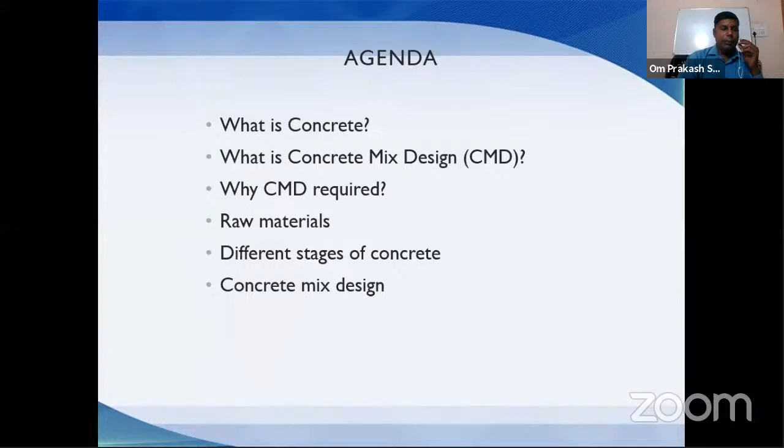So coming to the point, what is concrete? Basically, whenever we ask what is concrete, usually everyone says it's a mixture of cement, water, aggregate. Aggregate may be fine, that is also called sand, usually known as balu, reta, bajri at different names at different places. Then coarse aggregate - 20mm, 10mm, 40mm - and local names are gitti, rodi, and whatever.

And after that, mineral admixture. It is not required at small sites, or usually it is added to the cement also at a cement plant, and then chemical admixture. But as Jain sir said, a fixed proportion, a required proportion must be there. It's just like making a favorite recipe or tea - if balance is not there, the recipe or tea or the concrete, whichever we are making, will not serve its purpose.

And what is the purpose? For concrete, the purpose is workability - workability means how it will work, how we can work with it - strength, durability. These are some requirements it should satisfy. So how will it satisfy these? With the right proportion, the required proportion. That we will see in further slides.

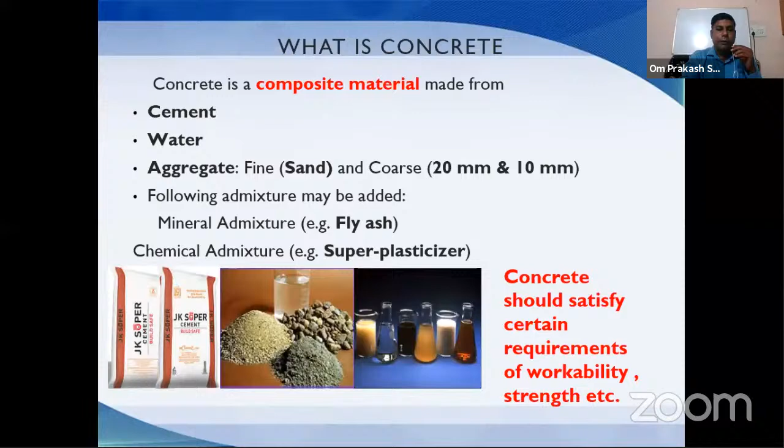So what is mix design? According to IS 456, it is the process of selecting suitable ingredients with certain proportions to satisfy the requirements. What are the requirements? Minimum compressive strength, or in some cases if tensile strength is also required, workability, durability, but it should be as economical as possible.

Why is economy required? Being an engineer, it's our moral duty to make optimization in civil engineering. Anyone can make concrete - you just add 10 bags of cement or 12 bags of cement, concrete is there. If your required grade is M20 or M25, you are adding 10 or 12 bags of cement - it's not economic, it's not optimized.

When is it optimized? When you are using the minimum quantity of cement and getting the desired properties, then it is optimized concrete mix design. And it is our moral duty, or we can say it is our liability as engineers, to make it economical, but there should be no compromise on the desired properties.

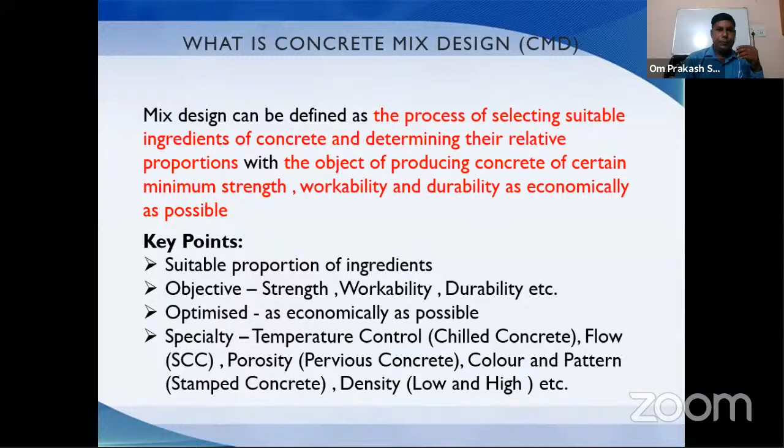So again, what is concrete design? It is the proportioning carried out to achieve specified characteristics at specified days, at the age of 7 days, 14, 28, 56, as per the requirement of site, workability, and durability.

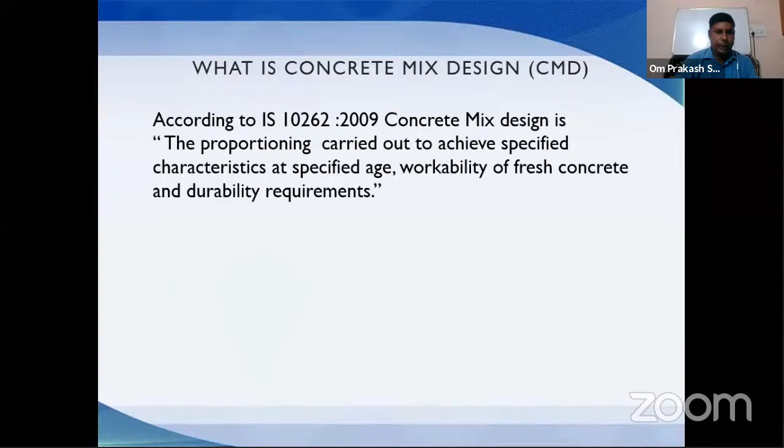Why is concrete mix design required? At regular sites, generally nominal mix design is used by all the contractors or engineers, and who are the designers for them? The labor present at the site, they are the designers of the mix. They decide how much bag of cement is required, how much quantity of aggregate to be added, what quantity of water to be added, and it's not fixed. It's just their experience, or site requirement, that they are just mixing and placing, and once it is set, nobody cares. Concreting has been done, my slab is ready, my column is ready, my beam is ready, all my structure is ready.

So the point is why CMD is required. Because we have to choose the best proportion to make it economic and to serve the required properties of durability, strength, and workability.

So what are the requirements for it? What kind of cement are we using? We must know this, along with the specific gravity of aggregate, fine aggregate and coarse aggregate. Their specific gravity is to be known.

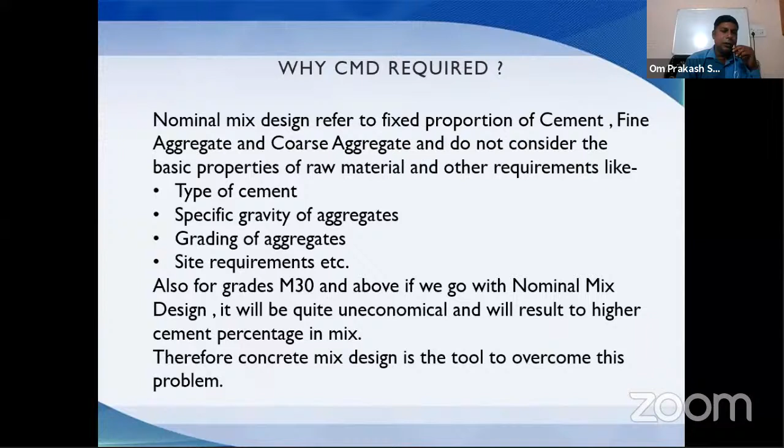So what is the proportion? Cement, fine aggregate and coarse aggregate -- 1:1:2, meaning one part of cement, one part of fine aggregate and two parts of coarse aggregate. This proportion is on weight basis, meaning you have to weigh the material. If you take a 50 kg bag of cement, you have to take 50 kg of fine aggregate and 100 kg of coarse aggregate.

But what is the practice at site? They do volume batching. They take one bucket or one pharma of cement, one pharma of fine aggregate -- sand, balu, reta, whatever -- and two pharma or two buckets of coarse aggregate.

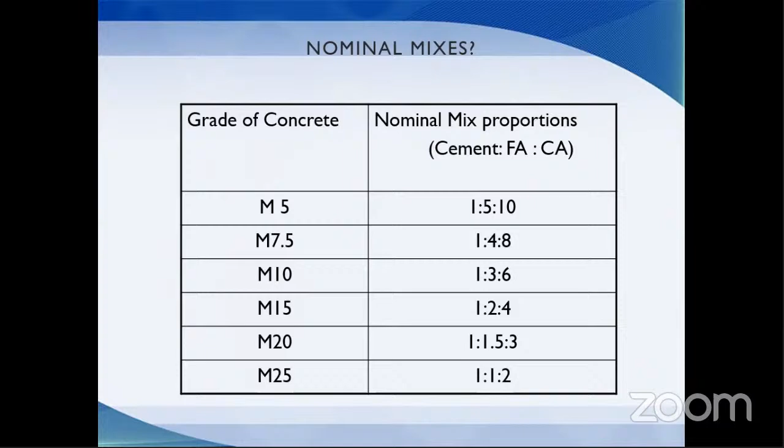And if we weigh them, we get to know the proportion which must be 1:1:2 is now actually 1:1.5:4. This means your cement percentage has been reduced, you are adding more fine and coarse aggregate, and you are still thinking about strength and durability. No, it is not possible, because the proportion has been made wrong. What is required and what has been done are very different.

So nominal mix design, generally carried out at the site, is not suitable to the requirement of the structure, or as far as consideration to the strength and durability.

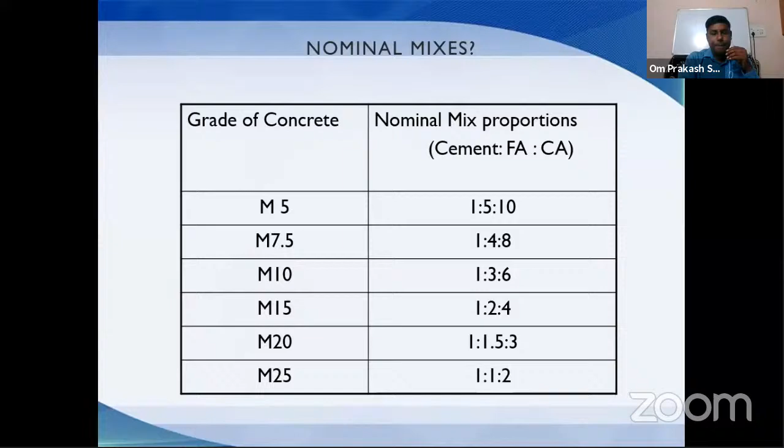Now, we will discuss about the material. Am I moving very fast, Ankit ji?

Ankit ji, can you hear? No, sir. Am I moving very fast? Okay, it's okay.

In our country, India, what are the types of cement available? We know there are various types, but mostly used cements are Ordinary Portland Cement and Portland Pozzolana Cement, that is OPC and PPC. In OPC, we have two grades, 43 and 53. Earlier, 33 grade was also there, but now it has become obsolete and replaced by PPC or PSC cement. So these four cements are mostly used, along with others like rapid hardening, sulfate resisting, and white cement. There are many types, but they are only 2% of the total cement requirement.

So what should be the property of cement? It should be fresh and of a good brand, meaning it should not have undergone any alteration. It should be lump-free; there should not be any lumps, since once cement gets moisture, lumps may form. And what are the requirements of the site? Where you have to pour the concrete, what is the requirement of the structure, what is the location, whether it is a coastal area or a hilly area - on this basis, cement to be used is decided. And proper storage is always required, whether it's a small site or a big project.

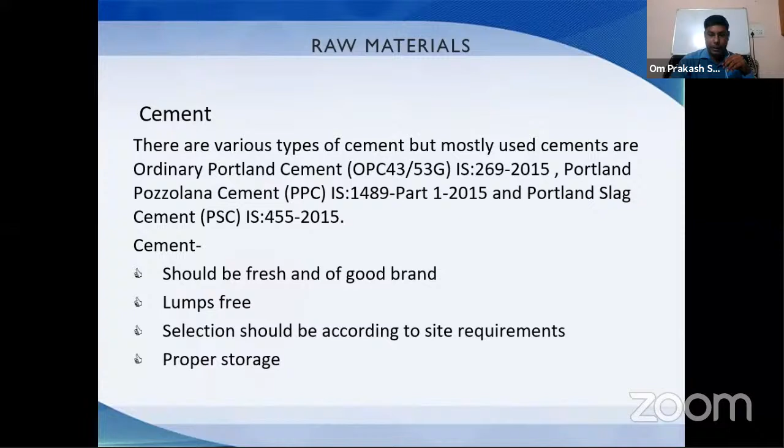Next is water. Let me tell you one thing - we all are civil engineers. After water, concrete is the most usable material in the world. Can you believe it - water is the most required necessity in the whole world, and after that, concrete is the most usable material in the world.

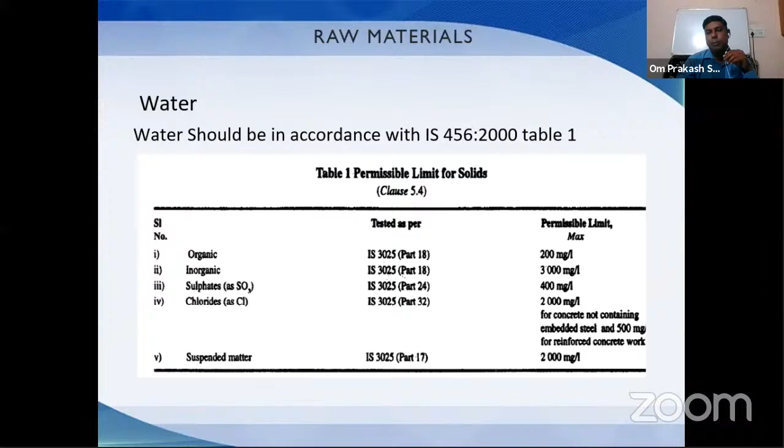So coming to the point, water. What should be the property of water? It should be in accordance with Indian Standard 456, Table 1, where certain properties of water are given: organic, inorganic, sulfate, chloride, suspended matter, and permissible limits are given there. If we test the water, it should be within the permissible limits. Or we can say potable water, which is drinkable water, can be used in concrete for both mixing and curing.

The pH of water should not be less than 6. If it is less than 6, it means the water is acidic, which will harm the concrete. As we know, the pH of neutral water is 7, so it is good if water has a pH between 6 and 8. Usually all potable waters have a pH between 6 and 8, so potable water can be used.

It should be free from organic impurities, and seawater cannot be used or must not be used while making concrete, or even while curing concrete. Seawater must not be used because it has so much salt and impurities, which will corrode the steel and ultimately cause a reduction in strength, loss of durability of the concrete, and final loss to the structure. A structure made for a 50 to 60 year service life may not give the desired lifespan.

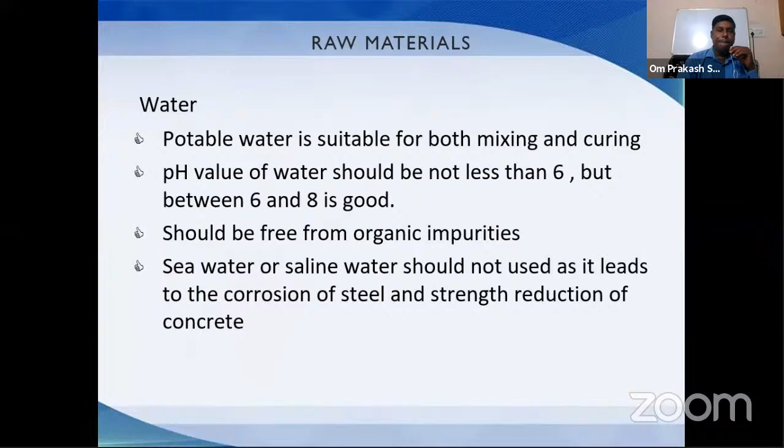So coming to fine aggregate and coarse aggregate. What are fine aggregates? The aggregates having a size of 4.75 mm and down are called fine aggregate, or in a simple way, we can understand 5 mm down aggregates are fine aggregate.

It should be coarser, angular, hard, and sharp grained. It should not contain organic matter, just like water - fine aggregate also should not contain organic matter. It should be strong and durable, and should be well graded.

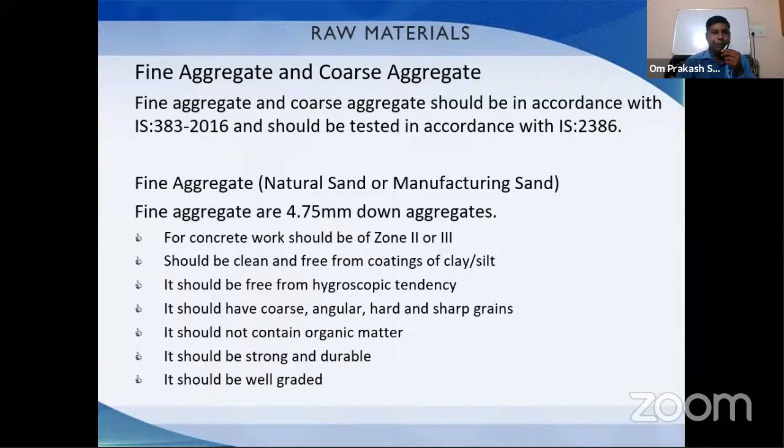So we have to take a sample of fine aggregate, make the sieve analysis on the given sieves, and check the percentage passing. All sieve sizes must have the required material percentage.

Zone 1 to Zone 4 represent particle size differentiation for fine aggregate. Zone 1 is the coarsest, and Zone 4 is the finest. For concrete mix design, we mostly need Zone 2 or Zone 3, which are the most suitable zones. In my view, Zone 2 is the best proportion or zone for making a concrete mix design with optimization.

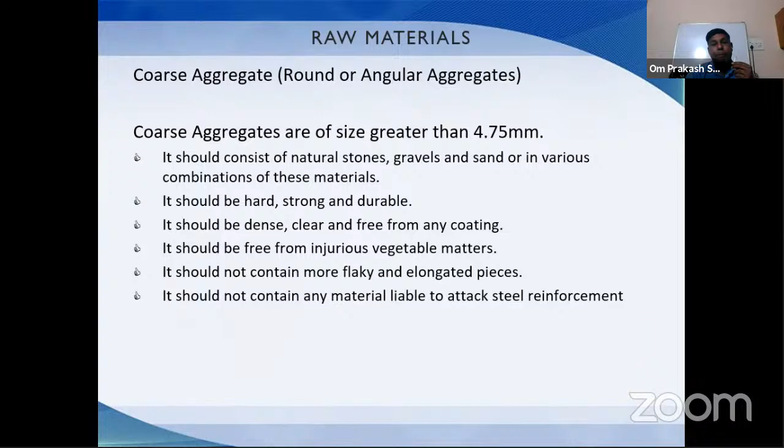Now coming to the grading of coarse aggregate. There are various sizes of coarse aggregate available: 63 mm, 40, 20, 16, 12.5, and 10 mm.

Mostly used coarse aggregates in concrete are 20 mm and 10 mm. 20 mm down aggregates are widely used in concrete, while 40 mm size aggregates are generally used in PCC or lean concretes.

So what should be the grading? Again, if we are taking 20 mm aggregate, we have sieve sizes of 40 mm, 20 mm, 10 mm, and 4.75 mm.

We have to do the sieve analysis of the sample of coarse aggregate which we are going to use in the concrete design, and again check the percentage passing. It should come under the given limits, and we'll discuss what to do if it's not satisfying the given limits.

If it is not satisfying the given limits, we can add a further size of aggregate, just like 10 mm, and make their proportion to achieve a close grading, which is given on the right side of the 20 and 10 column. Make a certain proportion, check for the sieve size, and it should satisfy the given limits.

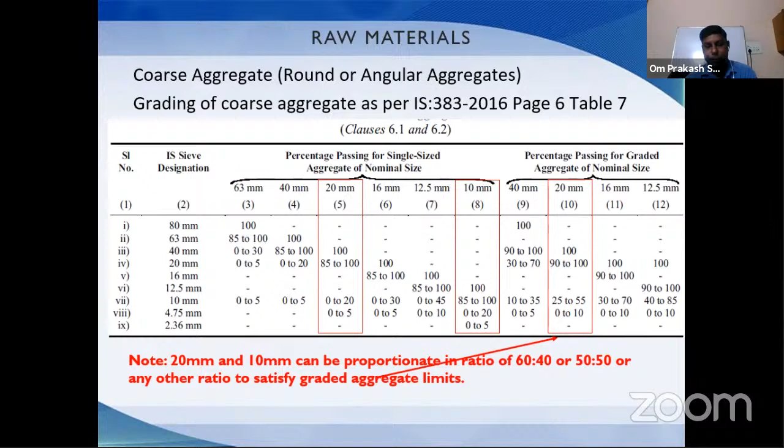Now, all-in aggregate grading is a very important term in concrete mix design. We use cement, water, fine aggregate which is sand, and coarse aggregate of 20 mm, 10 mm, or 40 mm. So the proportion of sand and coarse aggregate should be such that it gives you denser packing, or dense packing. For that, the limits are given in IS 383, page 7, table 10.

Take the proportion of sand, 20 mm, 10 mm, mix them, and go with the sieve analysis. The limits given are: for 20 mm nominal size, on the 40 mm sieve, all material should pass, meaning the material should be 40 mm down, so it should pass 100% from the 40 mm. Then on the 20 mm sieve, the proportion should be 95 to 100. On the 4.75 mm sieve, 30 to 50%; on the 600 micron sieve, 10 to 35%; and on the 150 micron sieve, 0 to 6%.

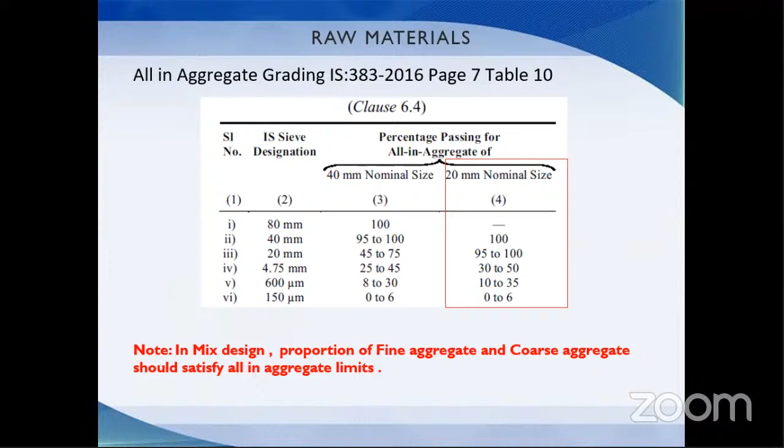My suggestion is to keep the readings within the given limits, but not at the extremes. For example, for 4.75 mm, if the percentage comes to around 38 to 45%, it is very good. And for 600 micron, if it comes to 15 to 20%, very good. This will give you dense packing in the concrete, which will ultimately save your cement, give you good workability, and result in higher strength.

Now, the most important term in concrete mix design is the SSD condition, saturated surface dry. Let me explain what SSD condition is.

As we know, there is a term in concrete mix design called water cement ratio, meaning how much quantity of water we are using and how much quantity of cement we are using. The weight of water divided by the weight of cement gives the water cement ratio, which tells us the quantity of water required in the concrete mixture. Why are we adding water? Because cement always needs water. Without water, there is no importance or working of cement. Cement will not serve any purpose if we do not add water to it. So what is our requirement?

Our requirement is to make the cement paste. We want to add water to the cement so that it makes the paste and the chemical reaction of hydration can proceed, along with providing workability. To explain again: when we add water to cement, it makes the paste, hydration of cement starts, and in the concrete mix, water is also required for workability. So why are we adding water? We are adding water for the hydration of cement and for the workability of the mix.

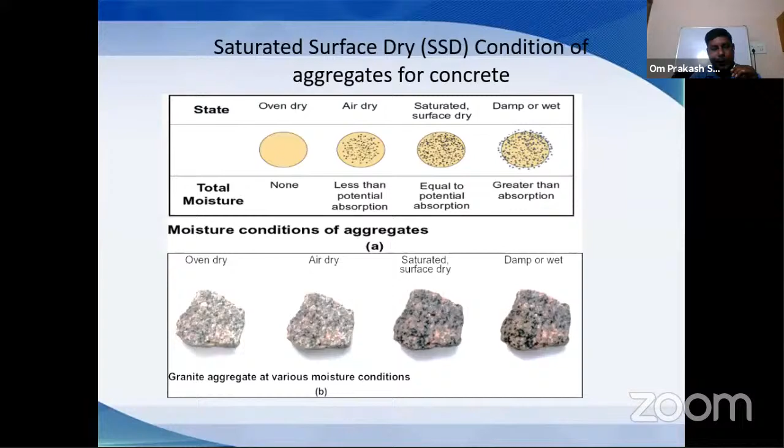Next, chemical admixtures. Chemical admixtures are widely used in construction these days. I think all of you have heard about Dr. Fixit, that advertisement done by Mr. Amitabh Bachchan - that Dr. Fixit is also an admixture. There are various types of admixtures: accelerating admixture, used for fast setting of concrete; retarding admixture, to delay the setting of concrete; water reducing admixture, to reduce the water demand of concrete; air entraining admixture, to increase the workability of concrete or to make lightweight or cellular lightweight concrete. The most commonly used admixture is super plasticizing admixture, which has two properties: it has the retarding property, meaning it delays the setting or maintains the liveliness of concrete for a longer time, and it reduces the water demand of the concrete.

So what should be the properties of the admixture? Certain properties are given in Indian Standard 9103, which we will not discuss here. The most important property is pH should not be less than, just like water - the admixture should not have pH less than 6. And if we are using chemical admixture in concrete mix design, it should give around 20, 25, or 30% water reduction. If we are taking it for just 5% or 7% water reduction, then it is of no use. It should not have any chloride content, or if it is having, it should be well within limits. And when we are using super plasticizing admixture, the strength of concrete should increase with respect to the control mix, which is prepared without the admixture.

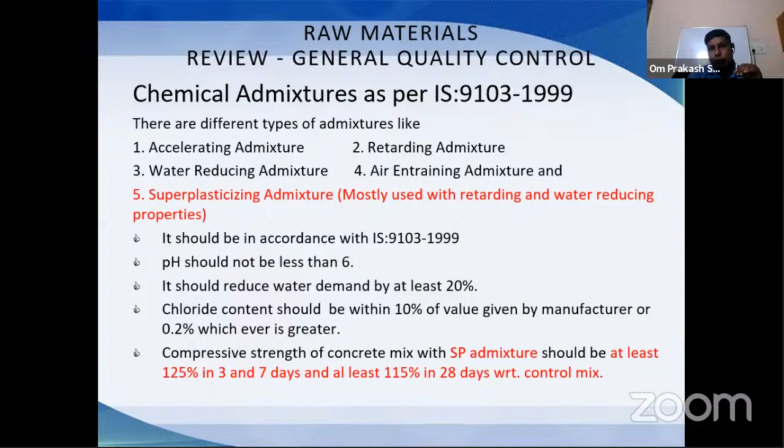So what are the different stages of concrete? First is batching of concrete, which we have discussed - nominal mix design, nominal batching, or concrete mix design, where the weights are given according to the concrete mix design. After that, mixing of ingredients - cement, water, fine aggregate, coarse aggregate, or chemical admixture, and if we are using further materials like polypropylene fiber or steel fiber, according to requirement. Then placing of concrete, where it has to be placed, like for column, beam, slab, or foundation. Compaction of concrete is always required - without compaction, concrete may lose 20 to 25% of its strength. Then finishing of concrete.

After we have finished placing the concrete, what comes next? The hardening stage. This means we have to cure the concrete for certain periods, let's say 10 days, 14 days, or more, up to 21 days as per the requirement. After that, once it is hardened, we have done sufficient curing.

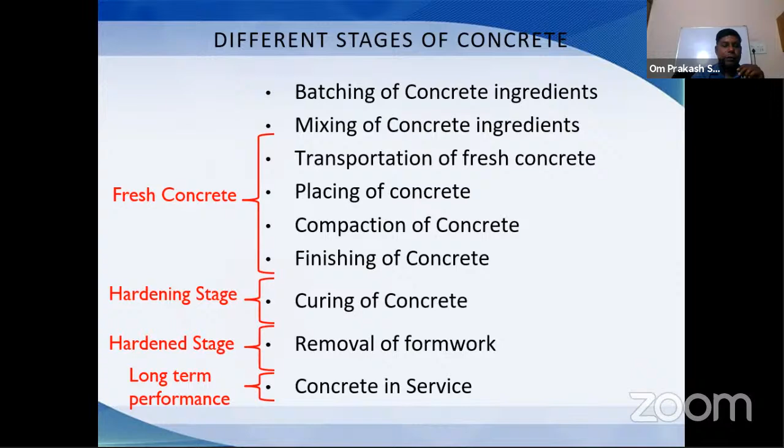So when it comes to concrete, we are discussing the characteristics required: strength at a certain age, workability, and durability. Now I am explaining workability. What is workability of concrete? The workability of concrete, in a simple definition, is not just by virtue of which we can do work with the concrete. No, it's not like that.

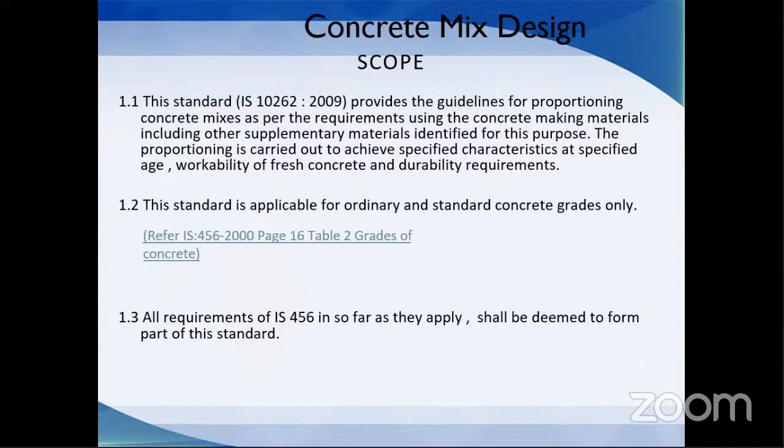Now, what are the concrete grades generally used at the site? There are three basic types of concrete grade: ordinary, standard, and high strength concrete. Let me show here.

Ordinary concrete is M10 to M20, or below M20, basically PCC, plain cement concrete, where steel is not used. M20 to M50 or M55 is standard concrete, generally used on various sites. M55, M60 and above are high strength concrete, generally used in projects where much load is to come, like metros or high-rise apartments in Mumbai or Delhi, where the stories are more than 50, 60, or 80 floors. There, such high grade concrete is used.

Now, what is M? M refers to the mix. Sometimes at the site, even engineers say M stands for masala. No, friends, please always remember M refers to the mix. It's not masala, it's not mortar. Masala is mortar, a mix of sand and cement where coarse aggregate is not used. M stands for mix only.

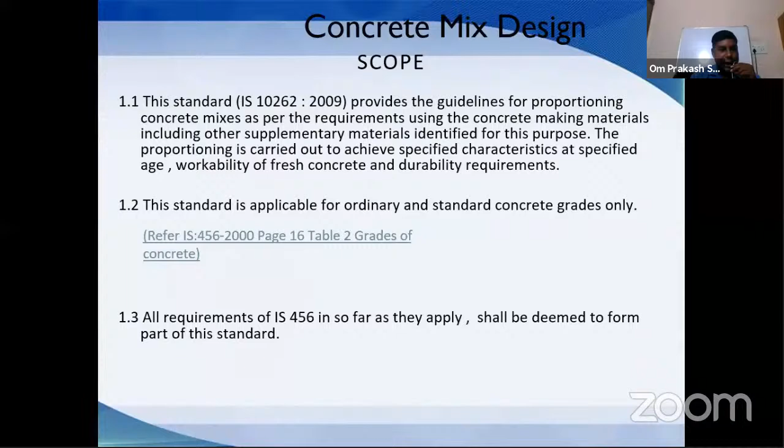So here are some references needed while doing concrete mix design. IS 383 refers to the specification for coarse and fine aggregate. IS 456, which we all engineers know, is just like a Bible to us. IS 2386, IS 3812 for pulverized fuel ash specification, and IS 269 for ordinary Portland cement specification.

Now, after 2015, the specifications for all cements have been included in only one code, IS 269. Earlier there were different codes for OPC cement. IS 1489 is for PPC, Portland Pozzolana cement. IS 455 is for Portland slag cement. And IS 9103 refers to the specification for concrete admixture.

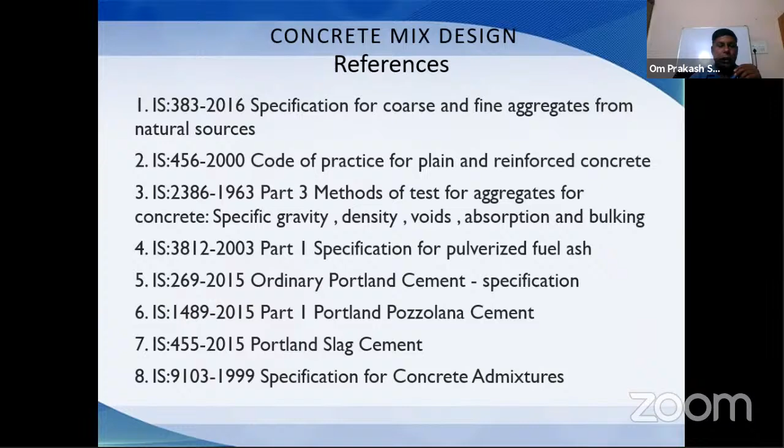So now we are coming to the practical work of a mix design. How will we do the mix design?

First of all, what we need, we must know what we are going to do. So what we need is the concrete grade. Obviously, we are going to do the concrete mix design, so then we must know which grade is required. If we don't know what we have to make, then what will we do? So we must know the grade of concrete, as we earlier discussed. We must know which grade we are going to produce, M20, 25, 30, 45, 50, which one. So we must know the concrete grade.

Then what kind of cement we are using? We are using OPC cement or PPC cement or PSC cement. In OPC, we are using a 43 grade or 53 grade. We must know the type of cement.

Then we must know the minimum cement content for a particular grade. What is the quantity of cement below which we cannot go? We will also discuss the maximum water cement ratio. We must know what should be the ratio of water to cement, and it is maximum. Cement content is minimum, meaning cement quantity is minimum, below which we cannot go. And the water cement ratio is maximum, meaning it cannot go beyond it. So our water cement ratio should be well within limits, and our cement content should be more than the required minimum cement content. And how will we get it? From where will we get it?

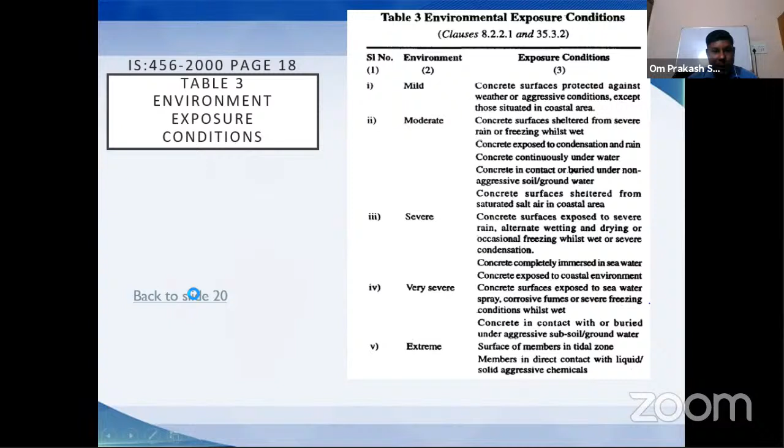Now, maximum nominal size of the aggregate. It means the maximum size aggregate - the biggest size aggregate that we are using, what is its size? As we discussed sand and coarse aggregate, coarse aggregate we are having 20 mm and 10 mm. So if we are using 20 mm, our maximum nominal size will be 20 mm.

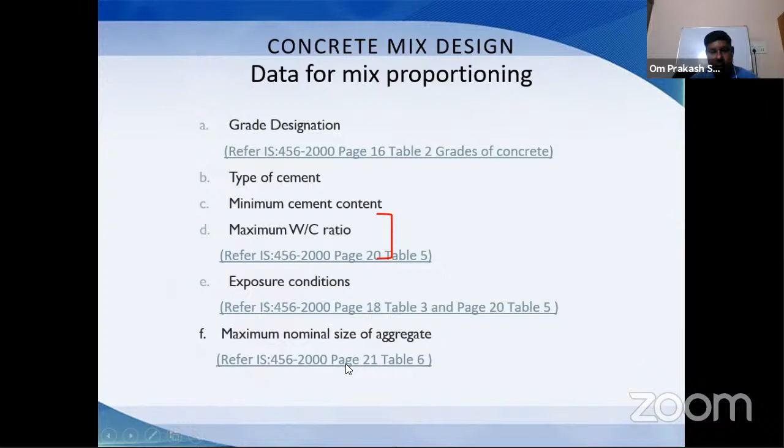And why is it required? Let's say we are making 3 concrete mixtures, each using 1000 kg of coarse aggregate. In mix A, the first mix, I am using 10 mm only. In the second mix, I am using 20 mm only. In the third mix, I am using 40 mm.

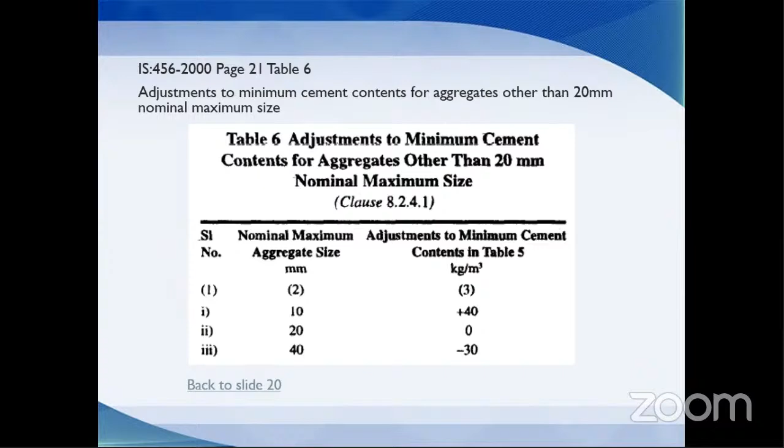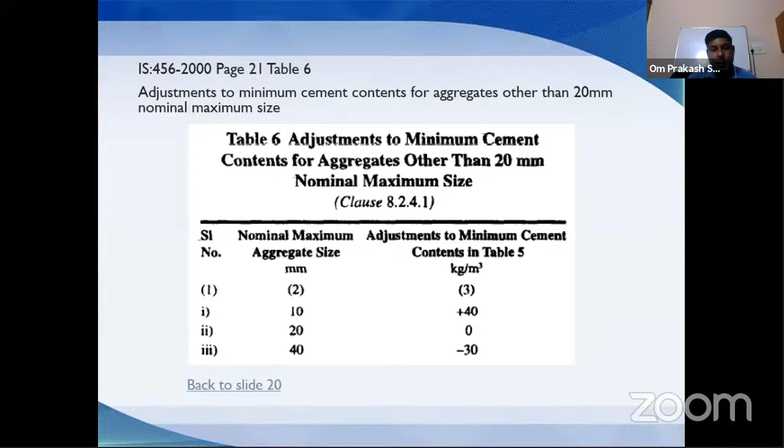So coming to the next requirement, workability. In IS 456 page 17, certain workability requirements are given according to the structure. It is given as very low, low, medium, high, and very high. Or in terms of slump value: 25 to 75, 50 to 100, 75 to 100, 100 to 150. Workability is to be selected according to the structure.

If you are doing mass concrete or lightly reinforced slabs, we can have a workability of 25 to 75. If we are doing concreting in a heavily reinforced structure, the requirement of workability or slump may be more than 100 mm.

Let me tell you about the slump. Slump is tested with the slump cone, where we fill the sample of concrete in 4 layers and tamp each layer 25 times. Then we gradually lift the cone and check the fall of the concrete - how much it has fallen, whether 50 mm, 70 mm, or 100 mm. The more the fall, the higher the workability of the concrete. The lesser the fall, the less the workability.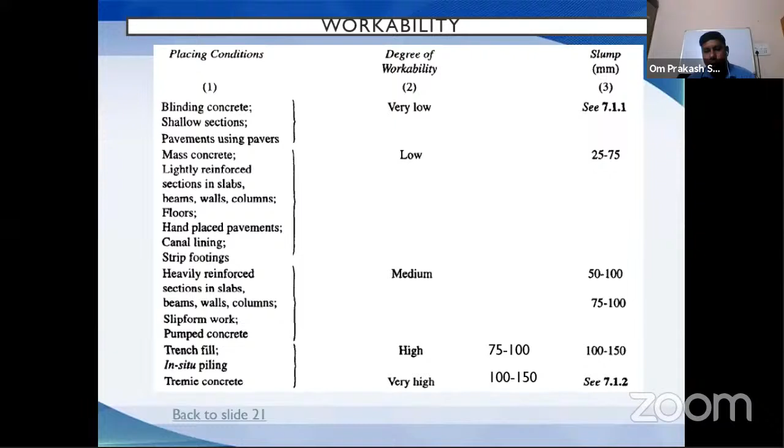Now, we have discussed about the minimum cement content. Now, we must know about the maximum cement content.

As per IS 456, we cannot use more than 450 kg of cement per cubic meter of concrete unless approved by the in-charge of the site or designated authority. This limit applies only in case of OPC cement. If we are using only OPC cement, we should not add more than 450 kg per cubic meter. If we are using PPC or PSC cement, or adding fly ash or slag to the OPC cement, then we can go beyond the 450 kg limit.

What will happen if we use a higher content of cement? If we use higher cement content, it will give high heat in the mix, due to which drying shrinkage means early thermal cracks will happen in the concrete, or at a later stage cracks may also form, which will ultimately harm the durability of the concrete.

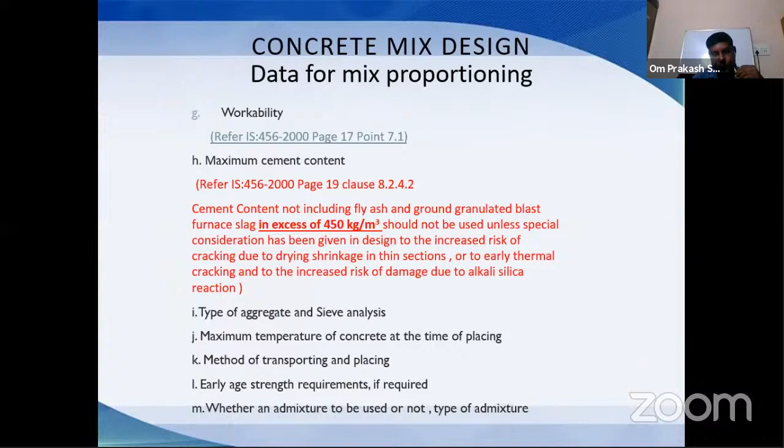So, how will we decide what will be the strength of the concrete? Here I am taking the example of M25 grade. There are certain terms: first is mean compressive strength, or characteristic compressive strength of the concrete, which is FCK bar, equal to FCK plus 1.65s, or FCK bar equals to FCK plus X, whichever is higher.

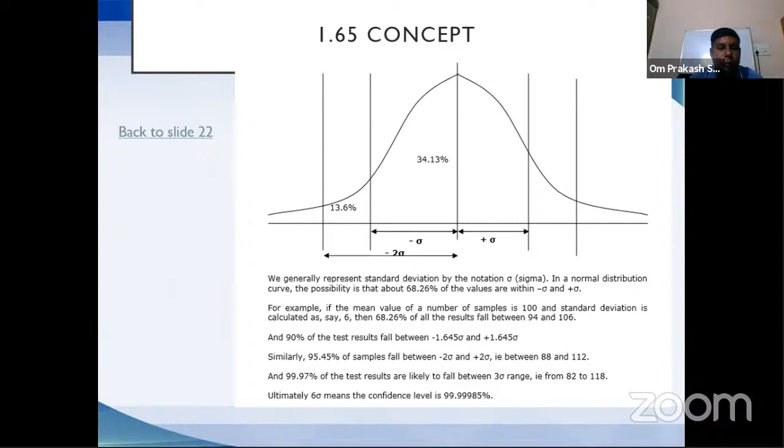This is the concept of 1.65. Here you can see minus sigma to plus sigma. 34.13 is on the lower side, 34.13 on the higher side. That means more than 90% of our results will fall in this range, and according to that, the factor is minus 1.645 to plus 1.645. From here, we have selected 1.65 as a correction factor.

Now what is the value of S? Value of S is the assumed standard deviation, which is given in IS 10262 for our reference. If we are designing concrete of M15 and below, the value of standard deviation S will be 3.5. If we are making concrete design of M20 or M25, the value of S should be 4. And if we are making concrete of more than M30 grade, the value of S should be 5.

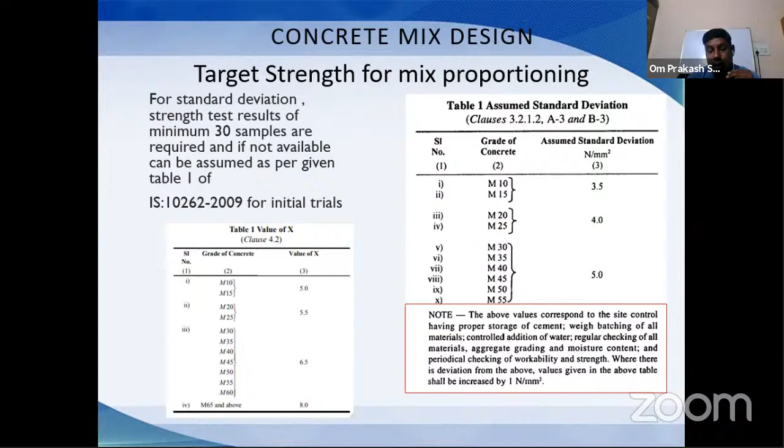So what will be the target strength for, let's say, M25 grade? FCK is 25 plus 1.65 into 4, the standard deviation. The value is 31.6. And from the next formula, FCK plus X means 25 plus the value of X, which for M25 is 5.5, that is 30.5. So which target strength will we choose? We'll choose 31.6, because whichever is higher, we have to take that as the target strength.

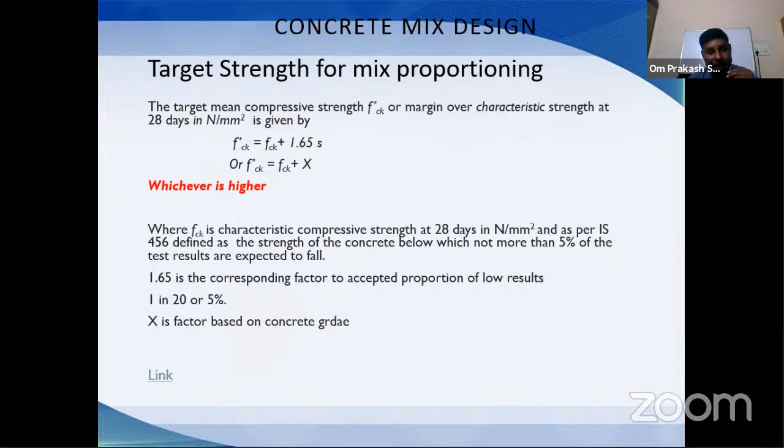Here we can see from where the 1.65 correction factor is taken. Accepted proportion of low results is 1 in 20, meaning in 20 samples, one sample may fail, or we can allow the failure of one sample after 20 samples. Then we use a factor of 1.65. If we allow only one sample out of 15, then we'll use 1.5. If we allow only 1 in 40 samples, then we'll use 1.86.

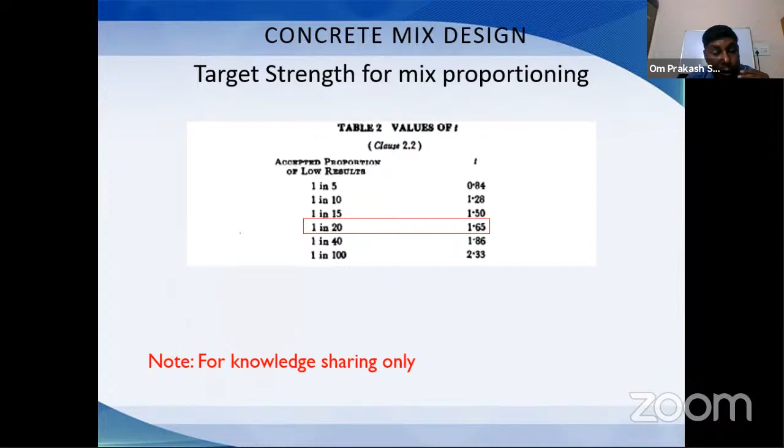Now, the first ingredient which we have to find out in concrete mix design is water. From where will we get the water value? We'll get it from the IS 456 table, or if we have past experience, from there we can choose.

But we must consider how much water is to be used in concrete, and the water content in concrete is influenced by what kind of aggregate we are using - meaning the nominal size of aggregate, as we earlier discussed, aggregate shape - what is the shape of aggregate, whether it is round, irregular, angular - aggregate texture, whether it is a smooth type aggregate or a rough aggregate.

Workability, whether we need high workability or lower workability; cement type, what kind of cement we are using - OPC or PPC or PSC cement; supplementary cementitious material, whether we are using fly ash in the mix or not, whether we are adding GGBS, granulated slag, or other; whether we are using chemical admixture or not; and environmental condition.

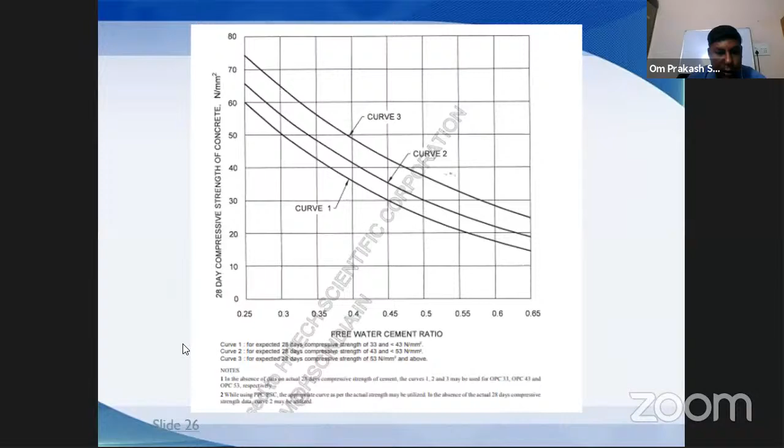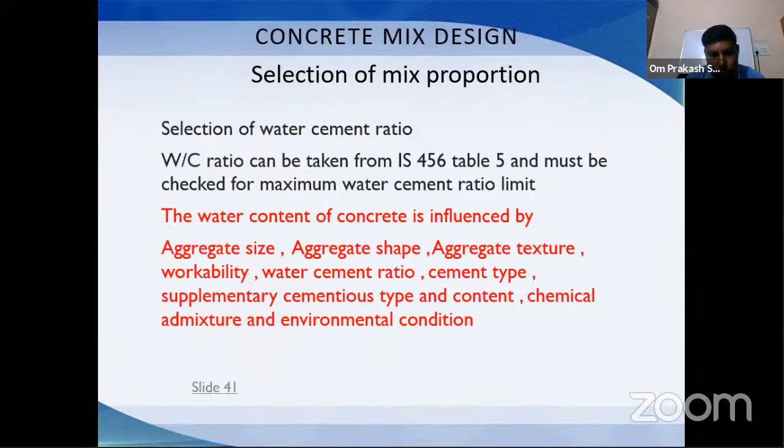Then we can use curve 2. Corresponding to 31.6, if we see the intersection at 0.5 and 30, the water cement ratio is 0.5. But my suggestion is not to go with this graph. Instead, we should go with the table given in IS 456. Here, for M25 grade, the maximum free water cement ratio is given as 0.5. So we can take the water cement ratio as 0.48, 0.47, 0.49, or 0.485 according to our requirement. No need to go with the graph. And this water cement ratio is irrespective of the type of cement. So it doesn't matter if you're using OPC cement, PPC cement, or adding fly ash to OPC cement. We can choose our water cement ratio from here.

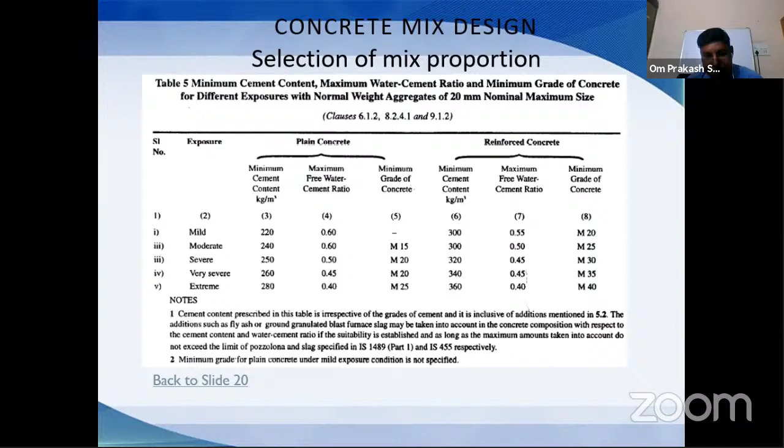So, after deciding the water cement ratio, we have decided 0.48 for M25 grade. What comes next? We have to find out the quantity of water, how much kg or how much liter of water is required.

In a table, for the nominal maximum size of aggregate, maximum water content per cubic meter is given for our reference. If we are using 20mm aggregate nominal maximum size, we can use 186 kg of water in a cubic meter of concrete.

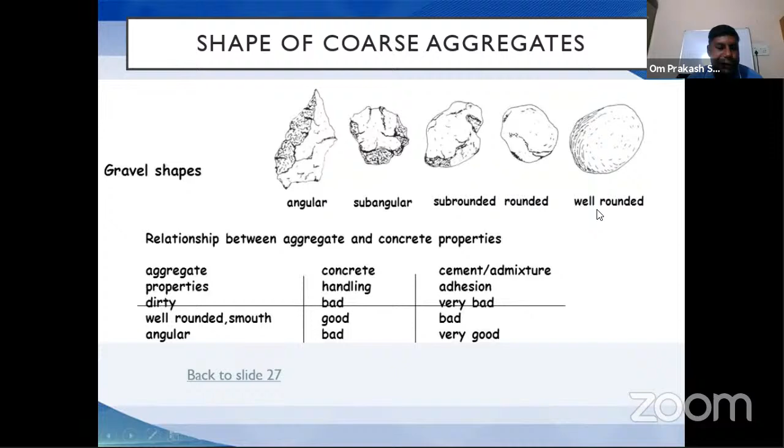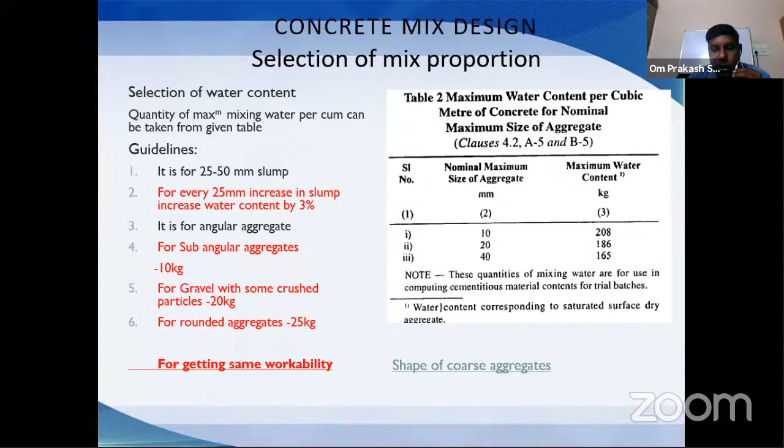Now we have found out the water content. Next is the quantity of cement. So if let's say we have found the water for 20mm as 186 kg, and we are taking the water cement ratio as 0.5, what do we have to do? We have to divide 186 by the water cement ratio of 0.5. It will come around 390 kg or something - 372. So that will be our cement content.

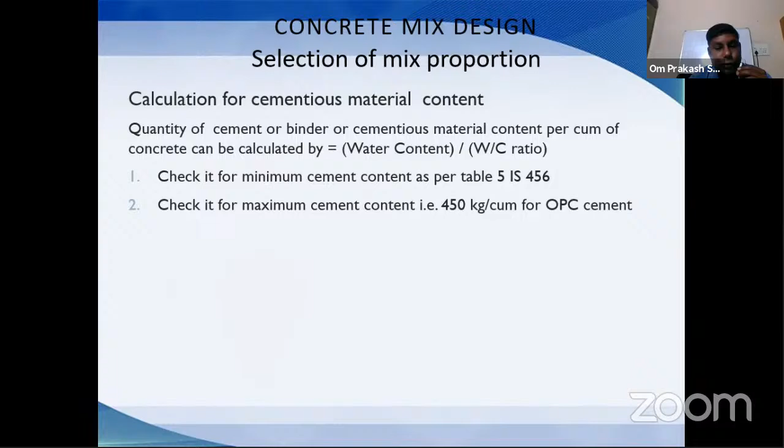Again, check it with the minimum cement content requirement. Just like for M25 grade, it is given as minimum 300 kg, so it should not be less than that. And again, check it for the maximum cement, that is 450 kg - it should not be more than 450 kg for OPC cement.

Now we have found out the water, we have found out the cement, rest is aggregate. Why is aggregate required? Basically the aggregate fills around 70 to 80% of volume in a concrete. If we do not use aggregate in concrete, it will be quite uneconomical, or there may be some durability issues if we use high cement content in the concrete mix. So we can say the aggregate works as a volume filler in a concrete mix. So what we have to do, how we can find out the quantity of aggregate.

In IS 10262 table 3 is given, where according to sand zone - zone 1, zone 2, zone 3 and zone 4 - and for the maximum nominal size, the percentage of coarse aggregate is given there. So we are having sand of zone 2, and we are using the 20 mm maximum nominal size aggregate, means our aggregate maximum size is 20 mm, not more than that. So how much percentage of coarse aggregate should be in concrete? 62%, that is 0.62, 62%. Means 62% will be coarse aggregate, that is more than 4.75 mm size, up to 20 mm. And 38% will be fine aggregate, that is sand, balu, reta, bajri.

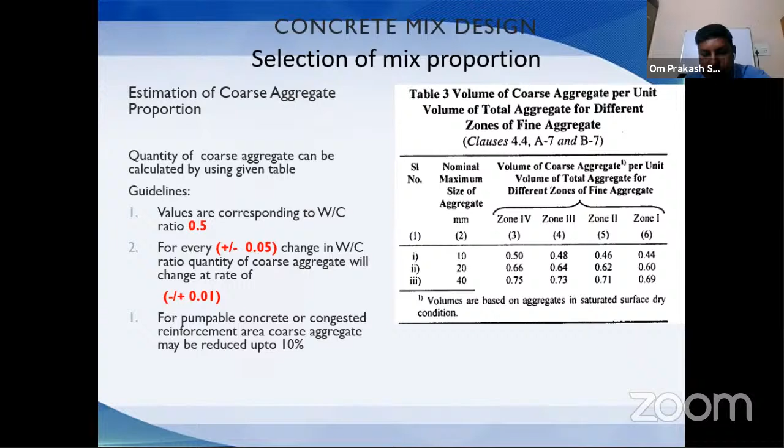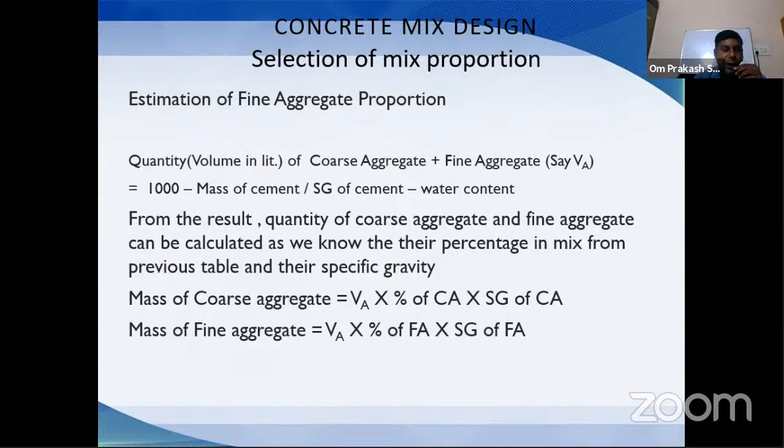By doing this, we will get the volume of aggregate. If we have the volume of aggregate, and here we have the proportion of aggregate, that is 62:38 or 64:36 - let's say 700 liter is the volume of aggregate in the concrete. After that, let's say 40% is the part of fine aggregate (sand), and the remaining 60% is the part of coarse aggregate. So what we'll do is multiply the total volume of aggregate with the percentage of coarse aggregate and the specific gravity of the coarse aggregate. And just like that, we will multiply the total volume with the percentage of fine aggregate and with the specific gravity of the fine aggregate. After that, we'll get the weight of coarse aggregate and fine aggregate.

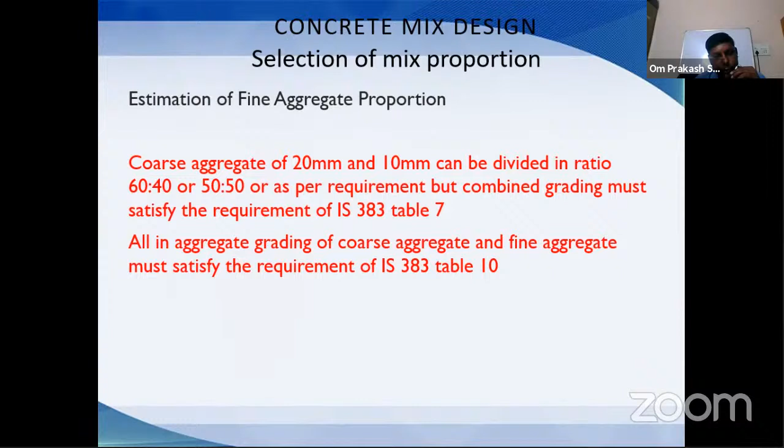We can divide coarse aggregate into 20 mm and 10 mm, which is good practice. Instead of using single size aggregate, use 20 mm and 10 mm size aggregate, which will give more dense packing, good workability, and economy as far as cement quantity is concerned.

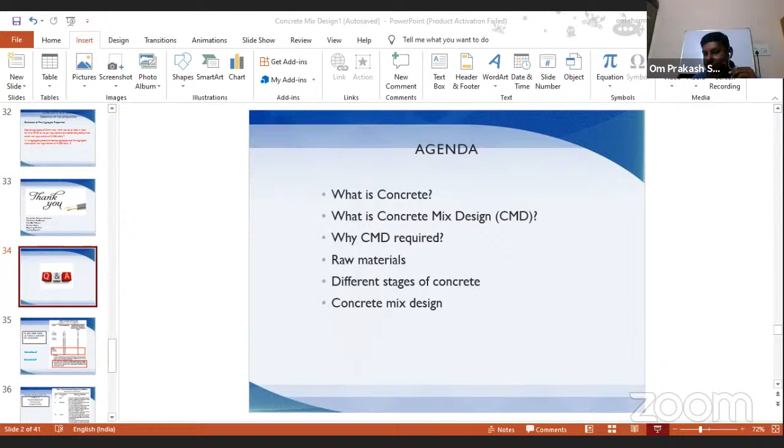From this exercise, we'll get more knowledge about concrete mix design. So generally what happens is theoretical becomes fine, but when it comes to the practical approach or practical calculation, a lot of people have confusion, people have problems. So on the Excel sheet, we'll do the exercise.

So here we are doing one exercise of grade M25. From this you will get more knowledge or explanation on how we calculate the proportion of aggregate, cement, and water. So what is first needed, grade designation.

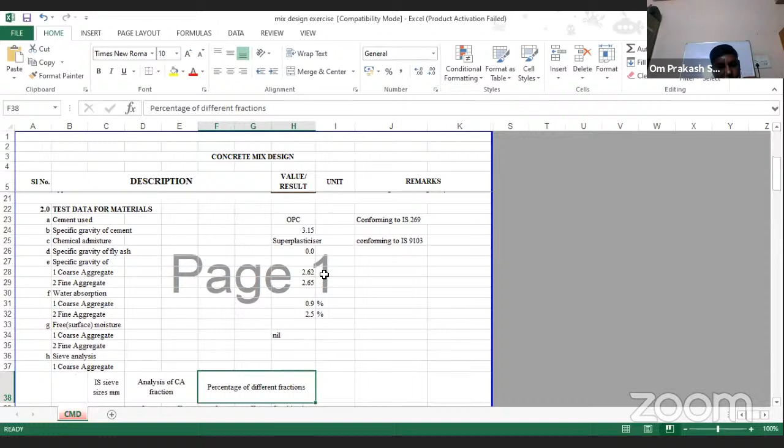Now here is my sieve analysis. From the left hand side: 20, 10, 4.75, and 2.36. The first is the sieve analysis of 20 mm aggregate, which is 98.8, 12.1, 0.2, and 0. The second is sieve analysis of 10 mm aggregate, which is 100, 94.6, 2.3, 0.3.

Here proportion I have taken is 60-40. So their combined grading comes out to 99.28, 45.1, 1, and 0.12.

Now, if I make this proportion 50-50, what will happen? See, on the 10 mm sieve size, the percentage passing is almost close to 55, 53.25, which is not good.

So what do I have to do? I have to reduce the percentage of 10 mm. So I am making it 55. It again gives 49, 1, and 0.135.

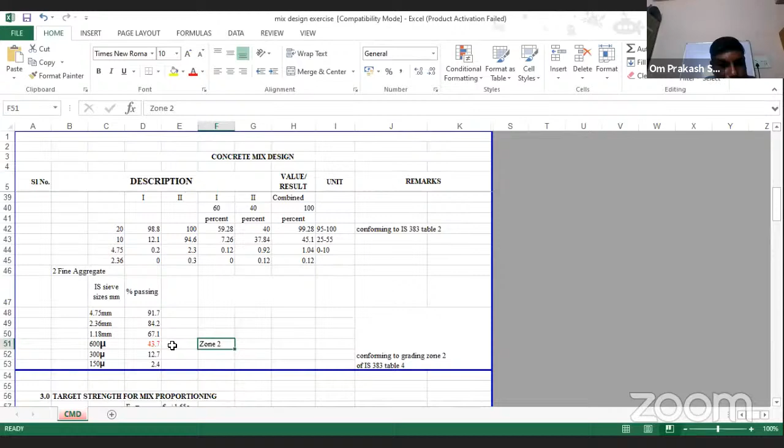After that, now we will go with the target strength. Target strength is FCK plus 1.65 into S. The value of S for M25 is given as 4 in IS 456. So 25 plus 1.65 into 4 equals 31.6. That is our target strength.

Next, water cement ratio. For M25 grade, water cement ratio maximum allowable is 0.5. So we can adopt, let's say, 0.485. 0.485 is less than 0.5, hence it is satisfying the maximum water cement ratio requirements.

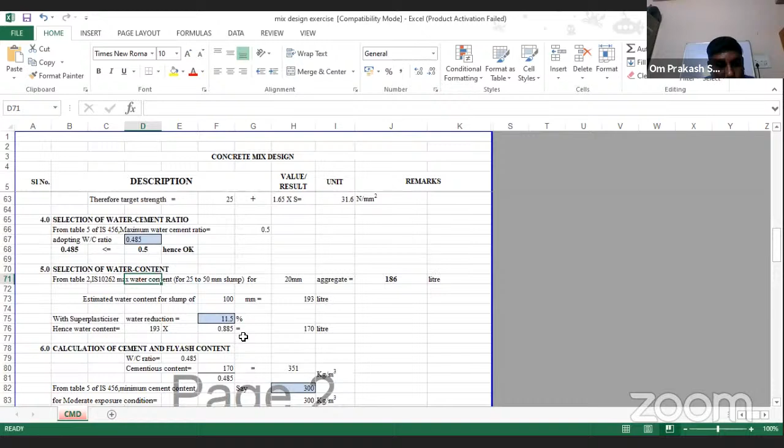Now coming to selection of water content. For 25 to 50 mm slump and maximum nominal size aggregate 20 mm, our water content is 186. If we use 10 mm as nominal maximum size, the water content will be 208. And this 186 is for 25 to 50 mm slump. Our requirement is 100 mm slump, which means we have to increase the slump by 50 mm.

So we have to increase the water. For each 25 mm increase, we will increase water by 3%. So for 50 mm, we will increase 6%. For 20 mm aggregate, 186 is given, and for this next 50 mm, we are increasing 6% of water. That comes to 193 liters.

Now, we are using a super plasticizer, so we are assuming that by using this super plasticizer, we'll reduce the water content by 11.5%. Okay, let's do not use the super plasticizer here. We are not using any super plasticizer in this mix, so I make it 0.

So what will be my water content? 193, if I am using the super plasticizer, and I assume that let's say 10% water will reduce when I use super plasticizer. What will happen? My water content reduced by 20 kg. But see friends, I am not using the super plasticizer here, I am making it 0. The water content is 193.

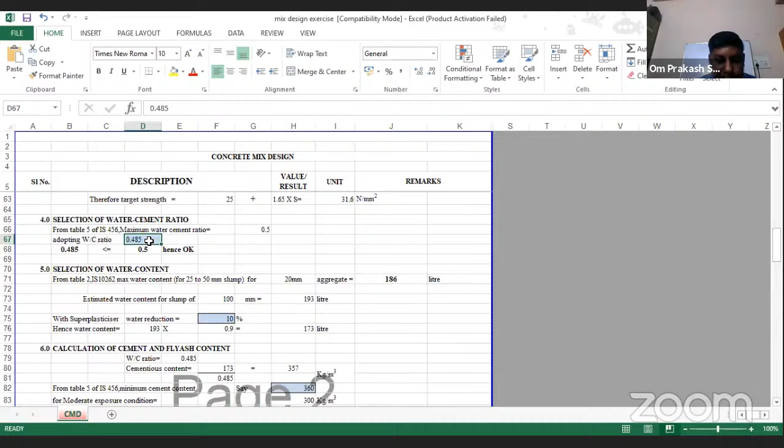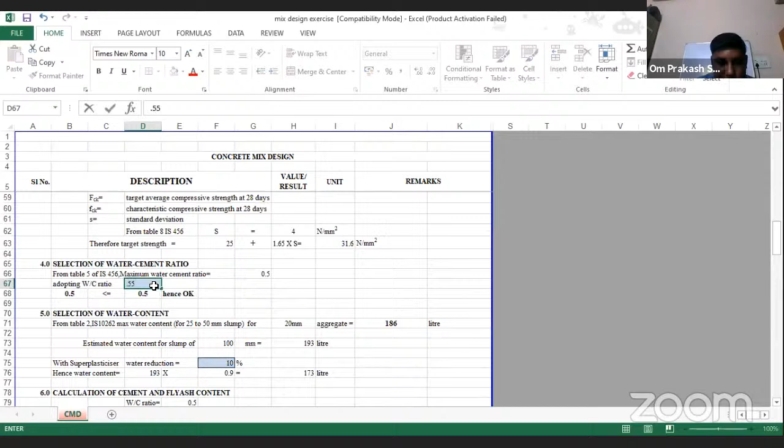water cement ratio of 0.5 here, what will happen? My coarse aggregate percentage will be same. If I increase the water cement ratio to more than 0.5, let's say 0.55, what will happen? My coarse aggregate percentage will reduce and fine aggregate percentage will go up.

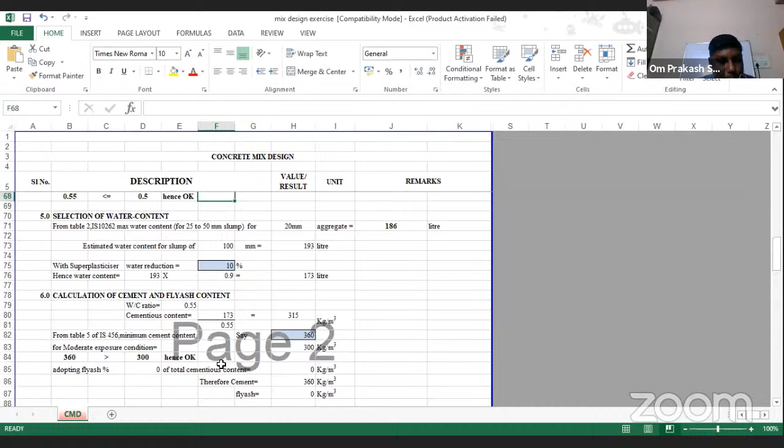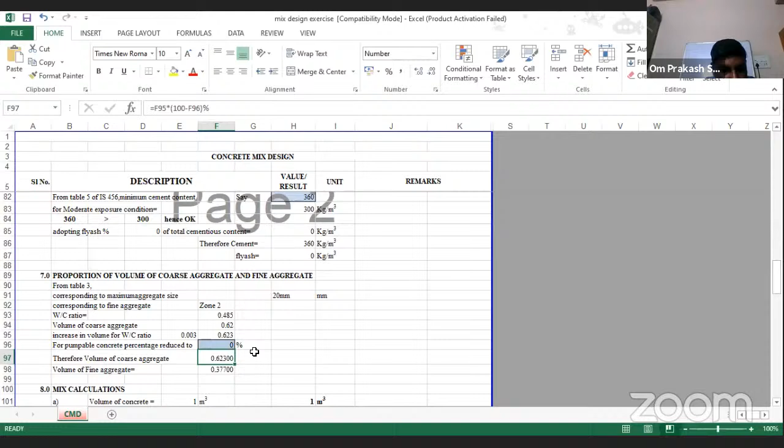So taking back to our 0.485 water cement ratio - 62% was the coarse aggregate percentage. Now corrected percentage is 62.3. Now for pumpable concrete, and we are not using pumpable concrete, so no further reduction in water, or 0. So what is our percentage of coarse aggregate? Coarse aggregate percentage is 0.623 or 62.3, and fine aggregate is 37.7.

Okay, now what we have to do? We have to find out the quantity of coarse aggregate and fine aggregate.

Here, from 1000, we will minus the volume of cement, which is given here. We have the weight of cement as 360 kg. We have the specific gravity as 3.15.

So if we divide 360 by 3.15, the volume will come to 0.1143. Just like for water, 173, specific gravity is 1 for water, then we divide, so it is 0.173.

And from 1000, I am subtracting both values. So remaining volume is 0.713. Here you can see almost 700 liters or 70%. This 70% volume is to be filled by coarse aggregate and fine aggregate.

Okay, now 71.3% is the total aggregate volume. I have to multiply it with the percentage of coarse aggregate.

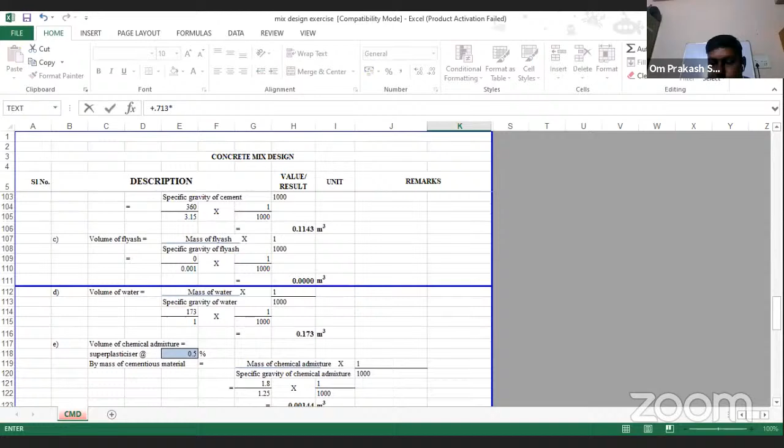0.713 into percentage of coarse aggregate, which is 62.3, so 0.623, and specific gravity of coarse aggregate 2.62.

This is 1163, which is the weight for coarse aggregate. And just like that for fine aggregate.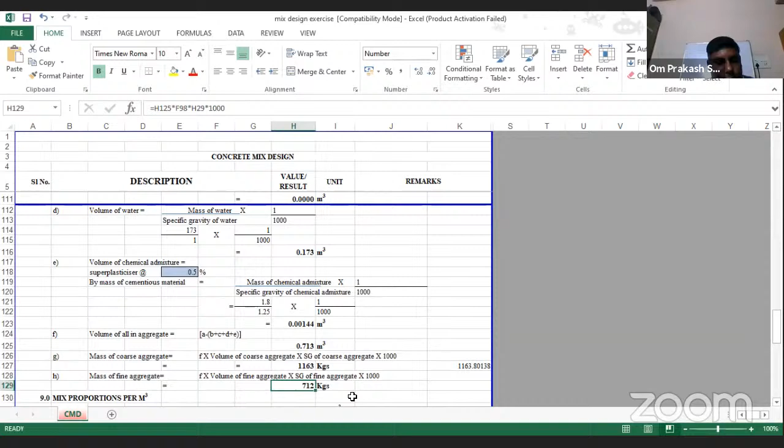0.713 multiplied by the percentage of fine aggregate, that is 37.7, into specific gravity of fine aggregate, that is 2.65. So here 712 is the weight of fine aggregate.

Again, we have taken the proportion of 20 mm and 10 mm as 60 and 40. So here 1163 multiplied by 60 will give the quantity of 20 mm, and the remaining shall be the quantity of 10 mm.

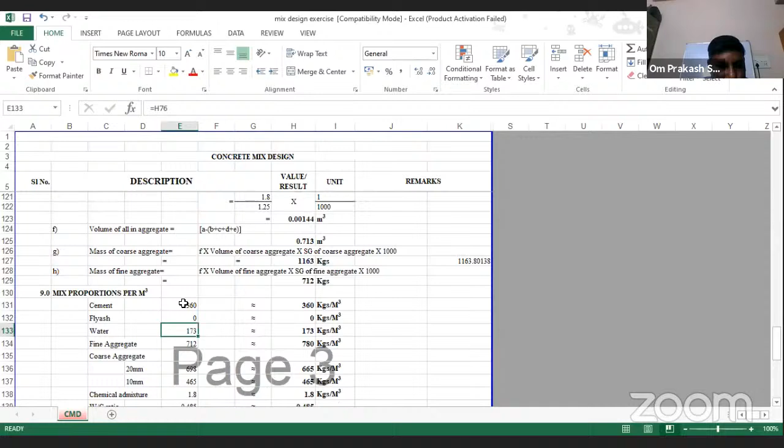So here is our final proportion. What is it? Cement is 360, water is 173, fine aggregate is 712, 20 mm is 698, 10 mm is 465.

Chemical admixture, I have taken as 0.5% of cement content, so it is 1.8 kg, and the water cement ratio is 0.485.

Okay, again, what we can do is slightly adjust the aggregates. So just like fine aggregate is 712, I can adjust it to like 710. Here 20 mm is 698.

I can write it as 700. 10 mm is okay, 465. So these are our mix proportions.

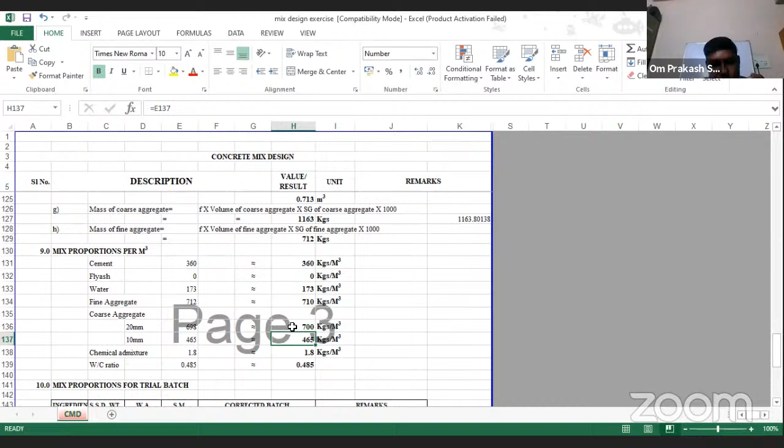Now next, what we have to do? We have to make a trial batch.

Cement is 360 plus 0, 710 fine aggregate, 20 mm 700, 10 mm 465, water 173, admixture 1.8 kg.

Now, how will we make the SSD condition? Here two terms, water absorption and surface moisture, I have taken into account.

If my aggregate is dry, then I have to increase the water in the mix according to the percentage water absorption of the aggregate. If my aggregate is having moisture, then I have to reduce the moisture.

Let's say my sand is having water absorption of 2.5 and total moisture of 4.

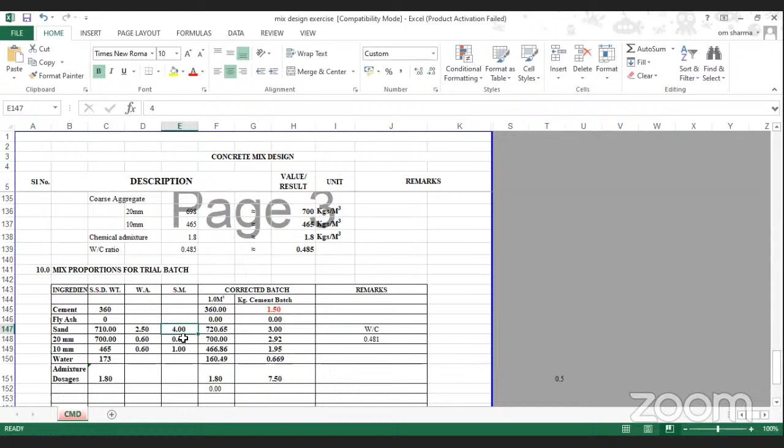I have taken the sample of sand and found that the moisture content of sand is 4%. That is the total moisture content.

So water absorption of sand is 2.5, meaning that 2.5% water of the weight of sand is required by the sand. It will take the water from the water we add.

If we are not increasing according to the water absorption of coarse aggregate and fine aggregate, they will absorb the water from our free water cement ratio and we will not get the workability.

If the aggregate is moist and we are not subtracting the moisture of the aggregate, it will give additional water to the mix, and our strength will go down while our workability will increase.

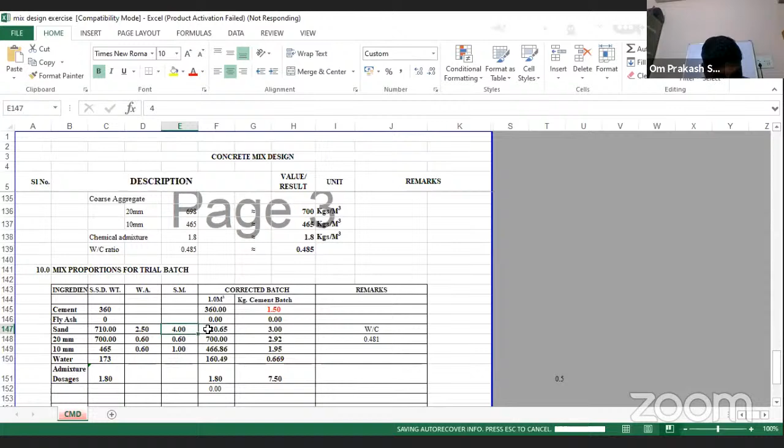So what we have to do? Check for the water absorption of the aggregate and check for the surface moisture. For water absorption, increase the water and reduce the material.

Let's say my material is not having any moisture, surface moisture 0, 0 and 0. All material is dry.

2.5 is the water absorption of sand, and 0.9 and 0.9 is the water absorption of the coarse aggregate.

What is happening? I have reduced the weight of material here to 692.25 and increased the content of water by 18 kg. Same here, I have reduced 7 kg of material and increased 7 kg of water.

Here I have reduced 5 kg of material and increased 5 kg of water. So my water was 173. Now my corrected water is 201.24.

So out of 201.24, 28.24 is the water which is required by these three materials for their water absorption.

Within 1 or 2 minutes of mixing, this material will absorb their water, and our free water cement ratio will be 173.

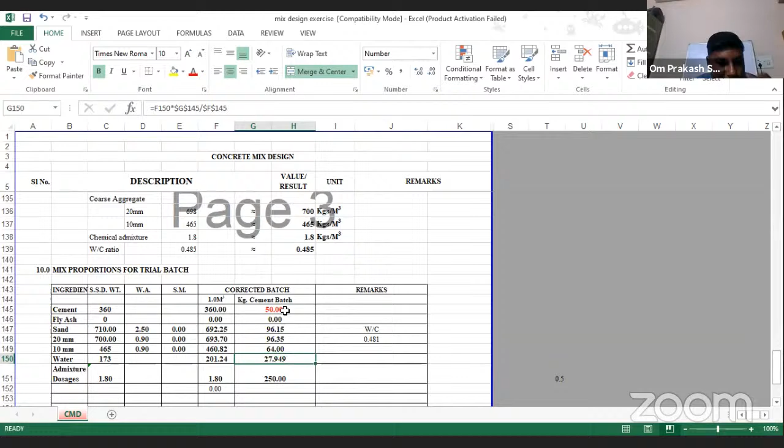Okay, now I am making the batch of 50 kg of cement. So for 50 kg of cement, my sand is 96 kg, 20 mm aggregate is 96 kg, 10 mm is 64 kg, and water is 27.9 or almost 28 kg.

So if we go with the final percentage: cement is 1, sand is 1.92, coarse aggregate is 3.2, and water we know is 0.485. So what is our final proportion? It is 1:1.93 is to 3.2. This is our concrete mix design proportion.

It may change according to our requirement or water cement ratio or according to grade. Now we will conduct the trial for this. We'll cast the cubes and check for the desired strength. If we are getting strength more than 40 or 45, we can reduce the cement content. If we are not getting the strength according to required target strength, we have to further increase the cement content or reduce the water cement ratio.

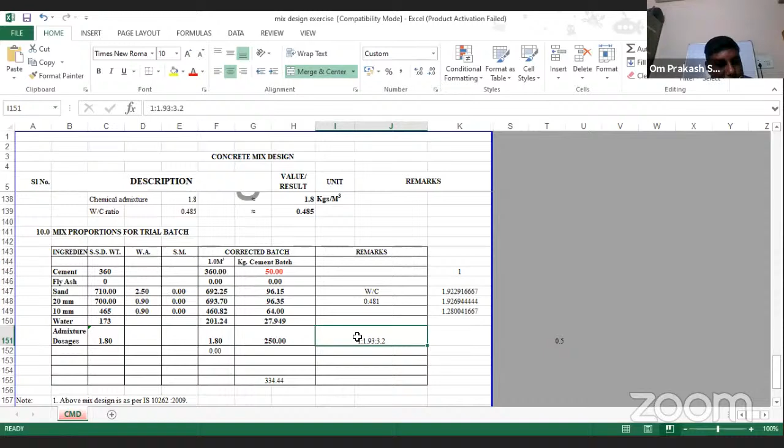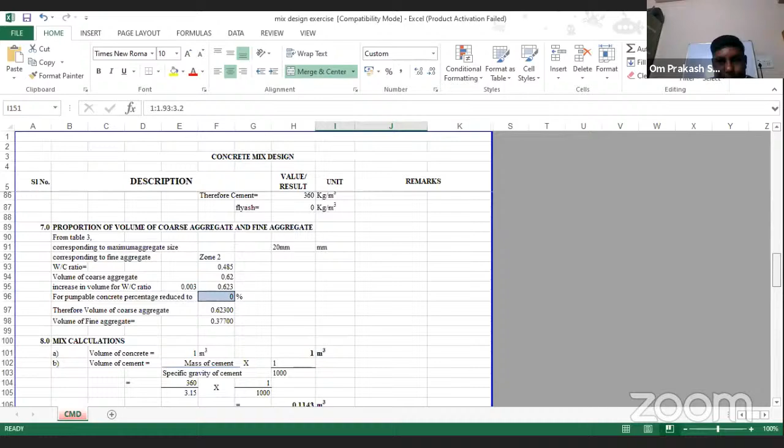Ankit ji? Yes sir, yes sir, this is all from my side. Please, if you have any question or query, write in the chat box. Can we take a 1 minute break? Okay sir, okay, yep.

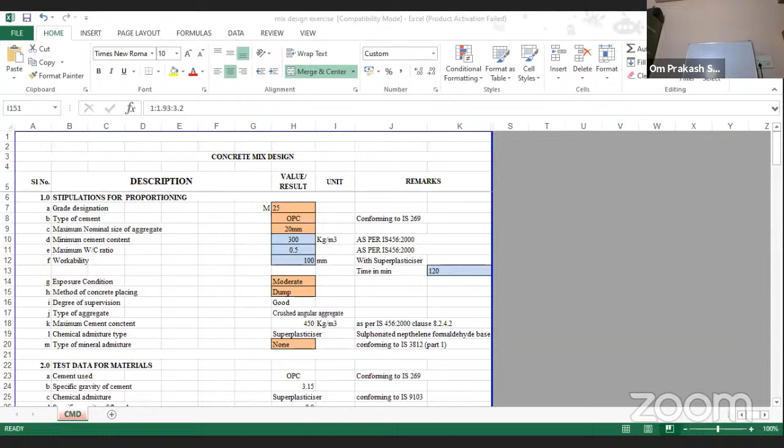If anyone has any query or question, please write in the chat box. Yes Ankit ji, we can start with the Q&A. Yes sir, yes sir.

Okay sir, some participants are asking for the Excel sheet. Yeah, we will share it to you. Yes, I will share it to you. Okay sir, thank you. Any further?

No sir. See, actually it's a wide subject field, just 1 or 2 hours will not do good for us. Oh yes sir, yes sir, I understand. The students must have hands-on practical, they must go to the lab and make this batch themselves and do a trial to see what is happening. Yes sir, then only they get to know what concrete mix design really is.

Initially it is a mathematical calculation, but once you go with it practically, it becomes hard for the person to grasp fully without hands-on experience.

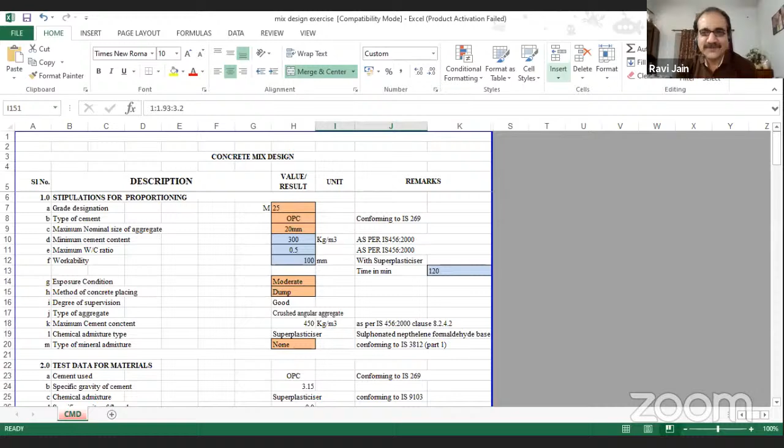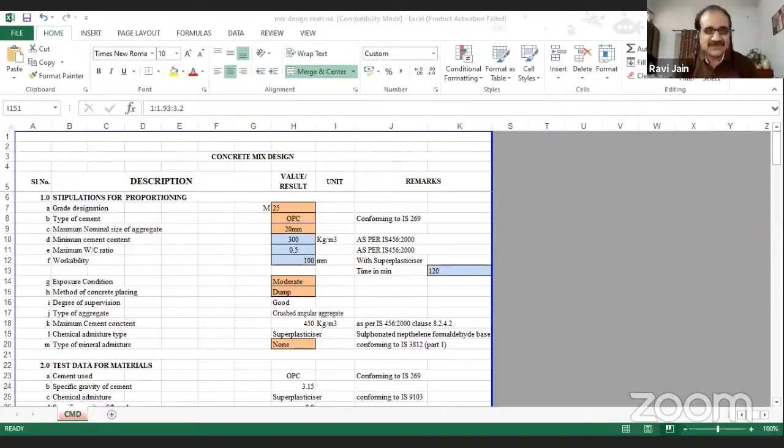Yes, sir. Till then, sir, you have tried to fulfill the expectations of the participants, and very nicely you have elaborated the things. वो जैसे मैं कहूँ कि वो गागर सागर को गागर में भरने का काम आपने इतनी देर में कर लिया. We know as a civil engineers, we all know that this is a very wide topic, but still you have done very nice efforts, sir. I must appreciate. And हम सब लोग मिलकर एक बार सर के लिए जोरदार तालियां बजा दें कि सर ने बहुत अच्छा काम किया है, बहुत अच्छे से सभी को एक्सप्लेन किया, बांध के रखा है सर. ओके, अंकित सर, प्लीज कंटिन्यू.